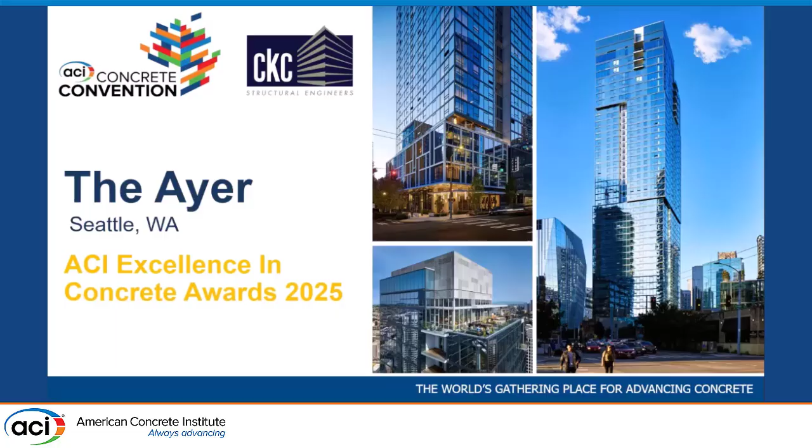So just a quick overview. It's 454 units. It's about 600,000 square feet, 6 levels below grade of parking, and then 3 levels above grade of parking. Beautiful lobby area with amenities that ties in the corner of that street.

Many thanks to the developer Holland Partner Group. The good thing about them, they're also the general contractor, Holland Construction. We'll also thank the concrete contractor, which is Conco Concrete, and Weber Thompson was the architect.

If you look at the building, the way it's been designed, it actually was inspired by the Pacific Northwest, where you have these jagged sides. This is actually the tectonic plates, quote unquote, per the architect, that shows that facade that goes in and out, which created some challenges for us from a structural standpoint, because we had to create these long cantilevers without moving columns.

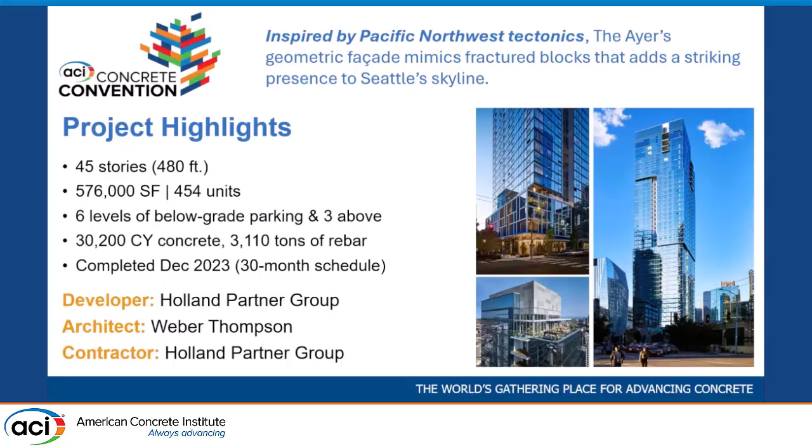Quick thing on the structural overview of the building, it has a lot of great innovations and buildable details throughout. So we use 8-inch post-tension slabs. We have spans about 29 to 30 feet and cantilevers up to 12 feet without any drop heads. We use high-strength columns up to 15,000 PSI. That was a bit challenging because the entire building was also one of the first buildings that used Type IL cement in the US of that size to reduce carbon footprint.

We're also on the walls. So the lateral system of the building is actually not allowed by the prescriptive language of the code, so we have to do performance-based design. So we analyze the building with this core, and we put fiber link beams that are not part of the code, but you can do it if you do nonlinear analysis and show that the performance of that core would work nicely. It takes a lot of energy.

You put 11 pairs of ground motion. Each one is about a minute long, and every 0.05 seconds, you check the stresses on the building as the 11 pairs move that model. So it takes a lot of iteration, a lot of back and forth.

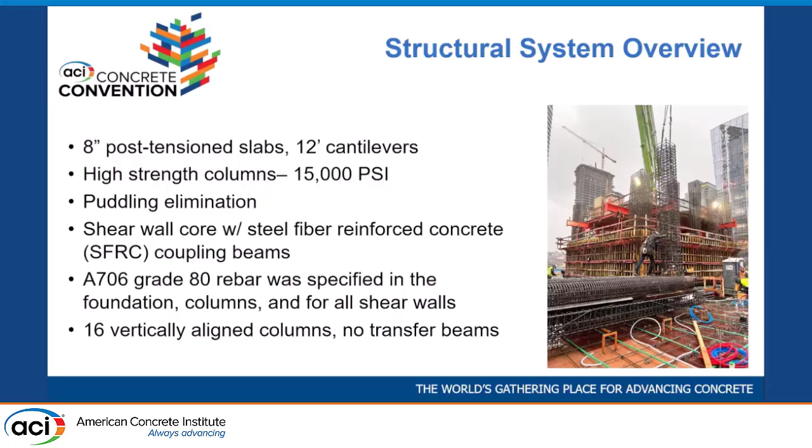One of the things we wanted to do is we had 16 columns. We worked hard and fought hard and negotiated locations with the architect and the ownership so we don't have to add any transfer beams. In buildings this size, a transfer beam would be a floor height and would slow down construction and would disrupt the behavior of the lateral system.

So here's a model. This is out of Revit, but you can see here in the middle, the red is the core, going concentric from the foundation mat all the way to the roof. You have 16 columns around. We created some crafty, you can see here, jogging and walking of columns. Some of them walked in 3 different directions, just so that we don't put any transfer beams.

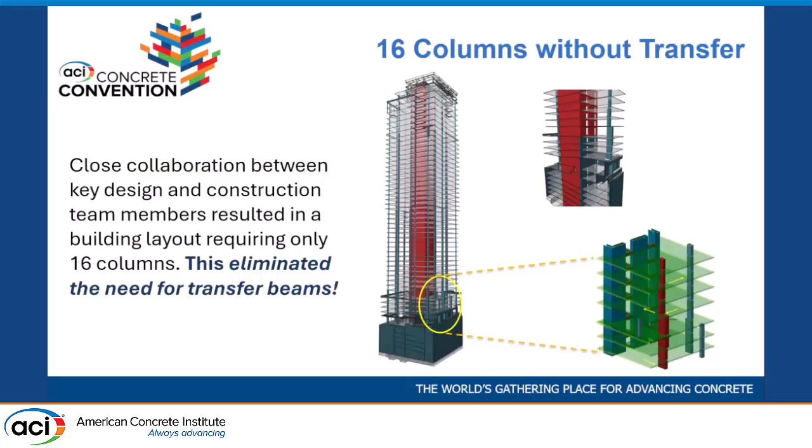So we didn't have any transfer beams at all from dynamic base. We call it dynamic base, which is grade level all the way to the top, which made things much easier, less congestion, and eliminated all the transfer beams that could impair some of the occupancy of floors.

One of the cool things we did, and this is supposed to be a video, maybe the next click should do it, is because we had a high strength. You can see here, this is the column, and the column was 15,000 PSI concrete, and the slab was 6,000 PSI concrete. So the code requires you to do puddling. I don't know if you guys know puddling.

You basically take another mix of concrete, you put it on top of the column, intermix, and then you don't have so much differential between the slab mix and the column mix at the column-slab sandwich, which is right here. I'm going to click to see if that video will work. Oh, yeah, it does. So these are the stud rails. This is a rebar. And these are the shear bars that we put in.

The green is the PT cables. You can see them here, too. And then this is the top reinforcement. And then you put this stay form. And then when they pour the slab and they stress it, you have this little hole because that stay form keeps the core of the column without being poured.

But it does not slow construction because you pour the slab, you stress, you have this little cavity over the column. The next day they come and pour the column, and the concrete mix of the column goes into that cavity. It's a pretty cool, slick trick. I'm gonna replay it again, see if that works. So you can see it again, and it avoids the puddling.

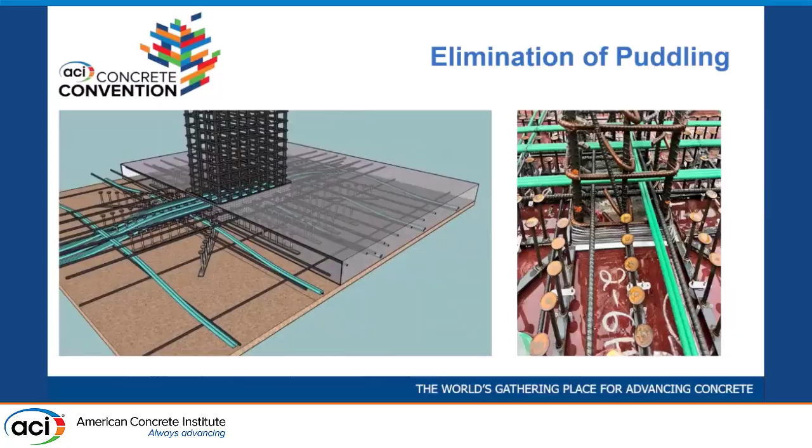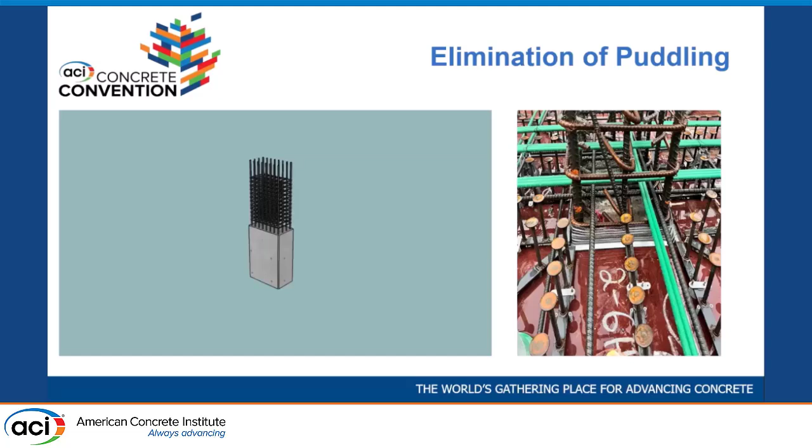What they did here, they put that stay form first. You have to make sure you put the shear steel bars so that on top of the friction between the concrete, you have shear steel that passes through. It's like a midpoint bar that goes into that joint. And then they put stay form again up here after they put the top bars, and they pour it. Much easier than putting two mixes and trying to intermix them. So that was a big thing on constructability and buildability.

The other cool thing on that job is we actually used fiber link beams. High dosage of fiber, you could see it, instead of using the diagonal reinforcement in these beams, because they are taxed by a lot of shear, and a regular beam does not work. So what we did here, we put basically that piece of concrete between the two walls. This is a boundary element of the wall, and this is the other boundary. Between the two walls, we put a special mix with high fibers.

It's about 160 pounds of fiber per cubic yard. It's a very healthy fiber dosage, up to 200, depending on what we need. But what happens is you reduce the rebar in that beam by about 40% from a typical beam. So it's much easier to place. You don't have the diagonal that clashes with the top rebar coming down. So it turns out to be a very constructible tool that streamlines the rebar of the core going up the building.

And the neat thing about it, a lot of times you can pour this after the fact. What they do is they pump the wall with concrete, they bucket this with a steep bucket with fiber concrete, they vibrate it, they put stay form, and they keep on going with the building. Here's a video showing how that fiber concrete is put in. It's interesting, we use the SCC mix.

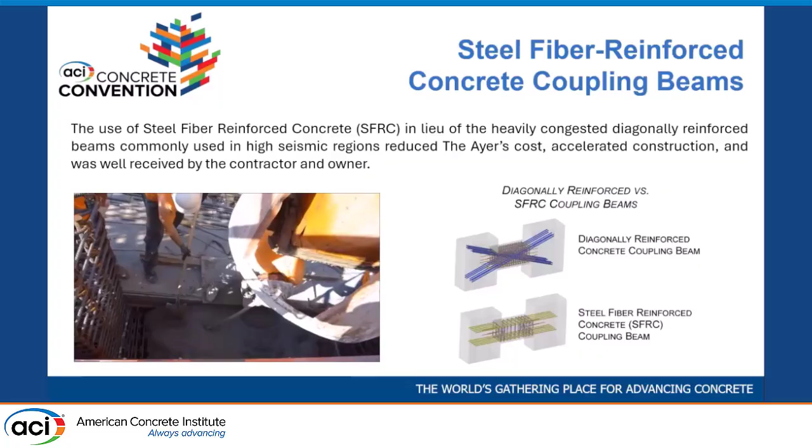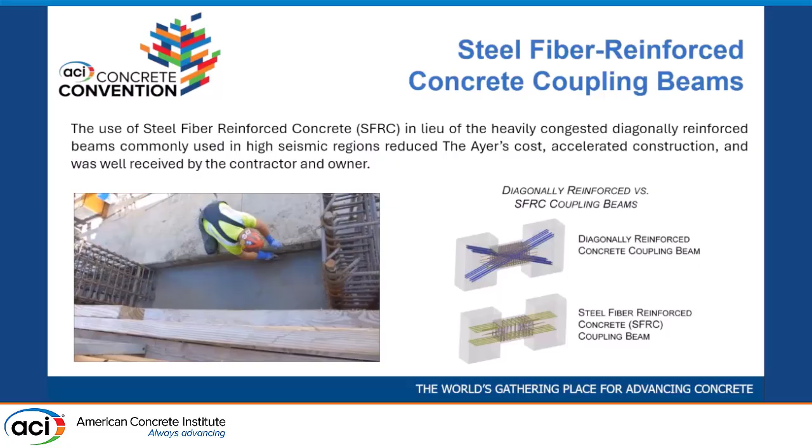When you put the fibers in, steel fibers, they don't suck water, but it turns the SCC mix to a 6-inch slump. You have a 27-inch slump for a self-consolidating mix, and you put these fibers in, suddenly you're down to 6 inches, plus or minus. But they're all over the mix, you don't see them when you strip, so it's a pretty neat thing. We've done about 15 buildings like this.

Now, the below-grade construction was really interesting. First of all, we start with the mat. We had a lot of cool concrete specifications for different concrete mixtures for the building, but the mat is basically about 10 feet thick plus. Around the elevator pit it's about 15, but most of it is about 10 foot thick. And they did a single pour for the entire mat, about 5,000 yards.

So basically, they start at night, they finish in the morning, about a 12, 14-hour pour. You have trucks coming in. So think about it, 10 feet of concrete, it's mass concrete. There's a high heat of hydration, so we always make sure that the cement content of these mixes is less than 450 pounds, and we extend the strengths, so you don't need that strength till about 90 days or 120 days, to make it easy on the ready-mix guys to bring those mixes to us.

If you pour that mix like a regular 6,000 mix with 600-pound cement, you won't be able to walk on it in 2 days. It's going to be very hot. So that's one. Two is we cover it so we keep the heat differential the same between the center and the top of the mat for a few days till things come down. We'll look at the temperature gauges for that.

The other cool thing is it's a pencil tower in the downtown, so it's 120 feet by 110 feet. So you want to go fast, and the basement wall creates trouble because if you have to pour the basement wall, pour the slab, pour the core, you'll be stuck in that hole 6 levels below grade for several months. One job we did, they were in the hole. They came to go down and up. Took them a year.

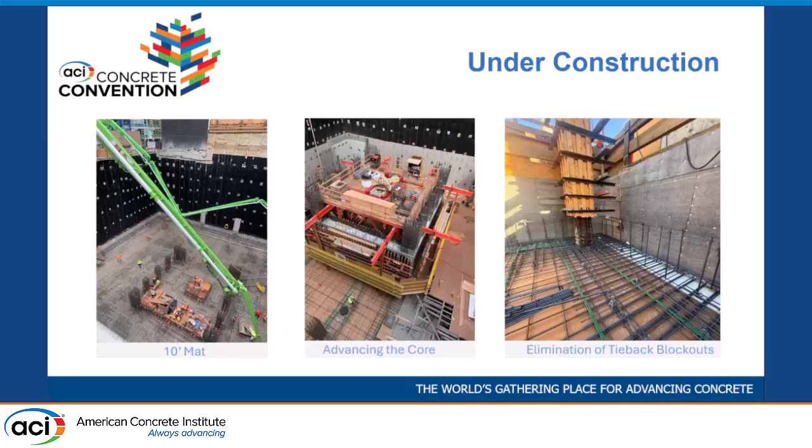The other thing we did is we created these column cages to lift, so you reduce the amount of times you put these columns on site. If you have 16 columns, they staggered the columns. It's a cage that goes 2 levels. So some of the columns, you only have to place half of the column every cycle of floors because the other one is already sticking up. We do the next one. So it's 2-story lifts. And that works really nicely and speeds up the floor cycles by quite a bit on the typical floors above in the building.

The carbon was interesting because by just using Type 1L cement, we were able to reduce about 10%. We did the math on it, about 450 tons of CO2 reduced right off the bat. And then being efficient with the transfer beam and all that, people don't realize a lot of the carbon reduction is the big question. You see all these highways and bridges, but you can easily reduce carbon by making your design more efficient by at least 10%. You always can make your design a bit more efficient. So that was a big thing.

And then high strength bars also reduce the embodied carbon. Depending how steel is made, either from iron ore or recycled steel, most of what we use in the Northwest is recycled steel, so there isn't a lot of CO2, but there's still some, because you have to heat it, melt it, and transport it. So by using high-strength steel, you reduce the amount of rebar you use, and that helps with the carbon footprint.

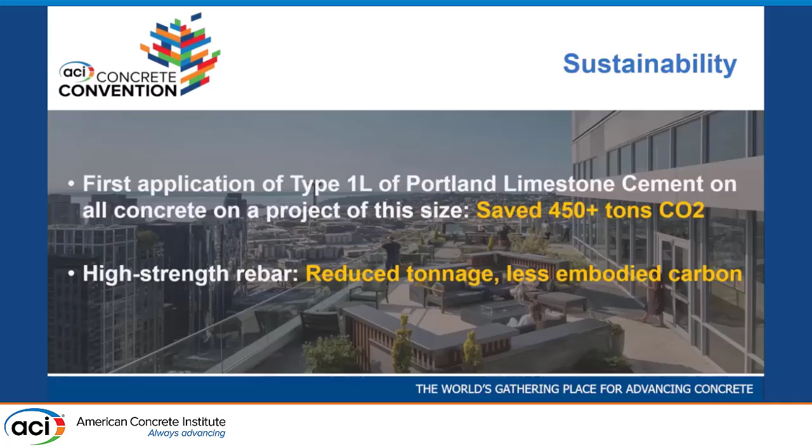So the project did great. We won the NAIOP High-Rise Residential Development of the Year in 2024. Last week, we won from NCSEA, the National Council of Structural Engineers Associations, at a summit in New York, the Outstanding Multifamily High-Rise Project category for 2025, and a few other awards and publications. And then the CRSI Award in 2024. And yesterday, we won the ACI Excellence Award, second place, but we're working on the first place.

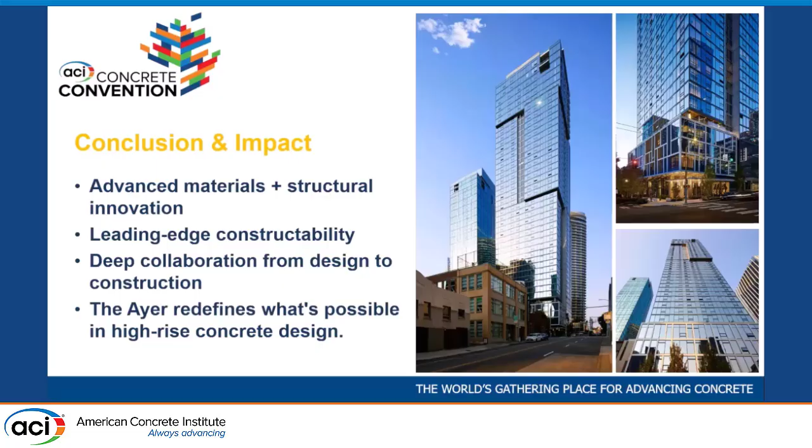So basically, conclusions: we are advancing material. We use innovative materials like fiber link beams, fiber in concrete, and leading edge constructability. I showed you that detail. And all of it happened through collaboration with the concrete subs and the ready-mix guys. We sit down with them early on and try to make them comfortable with the mixes. Otherwise, they get freaked out when they see a 15,000 PSI mix. And I think that's it.